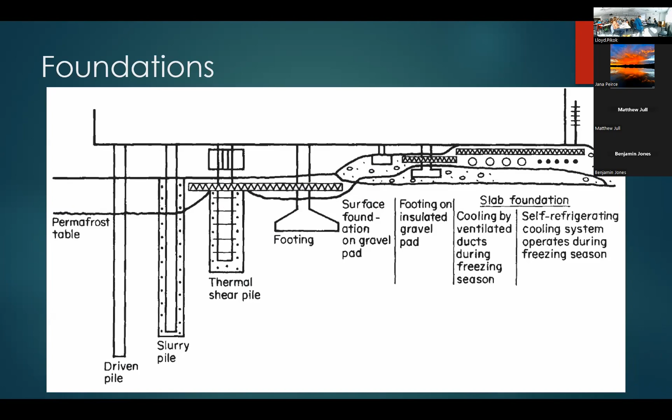But first, before we get into the piles, I want to talk a little bit about something that you're a little more familiar with, shallow foundations in permafrost, or shallow foundations just in thawed ground. Many of us live in thawed ground communities, and the way that we use our foundations is we let heat loss come out of the house, and it keeps the ground thawed, and it keeps it so that our house doesn't jack around or move, and we balance the energy from the heat inside the house and the cold outside the house to keep us in thawed ground, right?

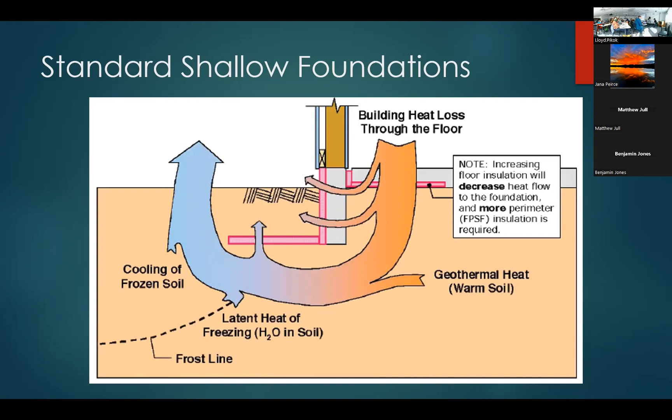And while we have a lot of people from communities in permafrost here today, this is kind of a more traditional, if you will, outside of the permafrost realm, what we do. And so the problem is in permafrost regions, we have this permafrost, and when you heat it up, it turns into soup. It turns into goo.

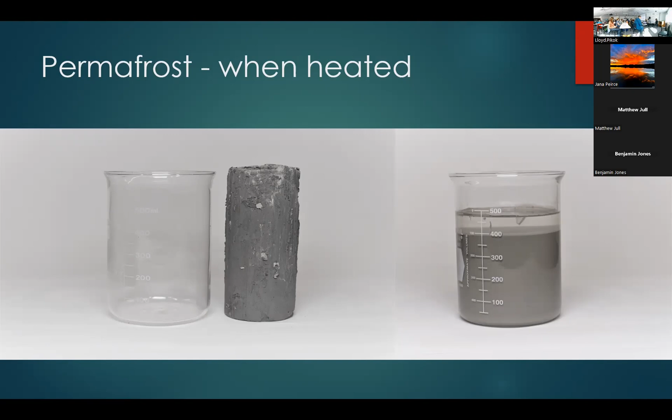I was in the bus with a few people looking at the foundations as we were driving into town, and people are observing. We've got these square piles, we got these round piles, we got a few different flavors, but what you see primarily is these houses that are off of the ground, right? And that's to decouple the structure from the ground below it, and keep the heat from going into the ground and thawing the permafrost.

Another thing that you don't see a lot of is concrete around here. How many concrete foundations have you seen in Utqiagvik? Not too many, right? There are some there, but cost of concrete, say in Anchorage, where I'm from, is about $150 a cubic yard. And then if you were to do it in rural Alaska, it's about $1,500 a cubic yard. So tenfold increase in cost. It's pretty inefficient to do that.

There's a lot of reasons why. Shipping batch plants and all the materials that you have to bring into rural communities is just not that efficient. And so as with the thermal protection and then the cost of other materials, we see a lot of pile foundations. So they're wooden piles, steel piles, you name it. Yeah, we don't see a lot of concrete around rural Alaska, and that's primarily a cost factor and efficiency of getting materials here.

So a lot of you that have worked in the permafrost regions, we kind of understand this, but I think it's worth taking a step back and making sure we're all on the same page with respect to what you're seeing out there.

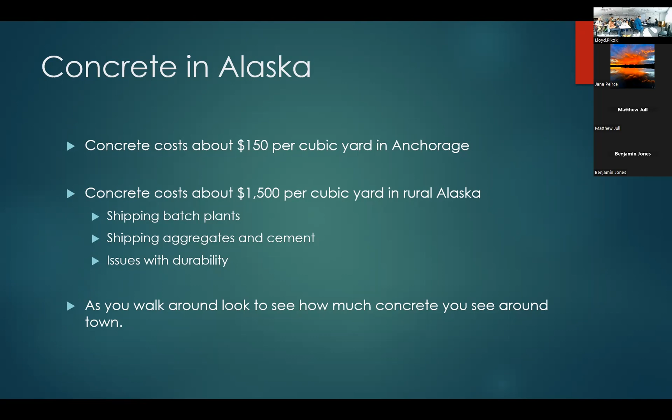So piles in permafrost foundations, we have a number of different pile types. Driven piles, so a lot of people are familiar with the driven piles. You use a pile hammer and you beat that pile down into the ground. The slurry piles are drilled holes that you'll set the pile in and then slurry back and let it freeze back. And then we also have a number of other sub pile types, helical piles that can be screwed into the ground, and a number of others.

There's a great UAF... what is it? The pile that crumpled up like an accordion is sitting there in the engineering department. If you're ever at the UAF facilities, take a look at that pile. Great example of crumpled piles. So this is a personal example of something that I've had to deal with driving piles in permafrost.

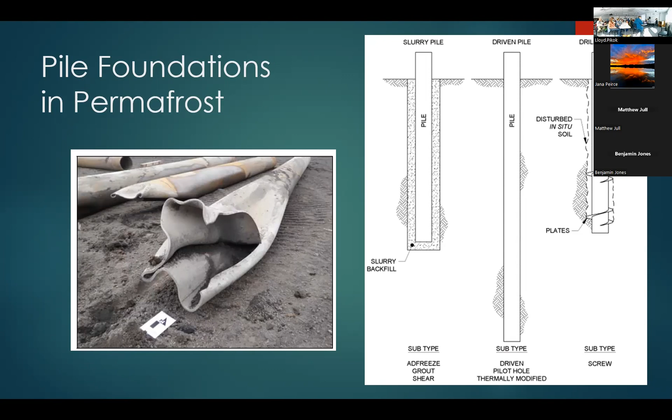So anyway, you got several different types of piles. And so I want to talk a little bit about how piles work, just so we're all kind of on the same page here. They essentially have what's called an ad-freeze strength. And that's the bond between the pile and the soil. I don't know if any of you have licked a flagpole in the winter. Right, that's ad-freeze strength between your tongue and the flagpole. That's the same thing that's going on within the soil as you let it freeze back and grab onto that pile.

You also have a creep movement. So there's that ad-freeze strength, that bond between the pile and the soil. But then there's also what's actually probably more important in ice-rich permafrost, like Point Lay and other communities, where you have this more viscoelastic response or behavior, where you have creep movement over time. You have this load that's applied over a period of time, and things just kind of sink into the ground. And so that's that creep movement. That's oftentimes, especially with heavy loaded structures, what really drives the design for how much movement you can allow.

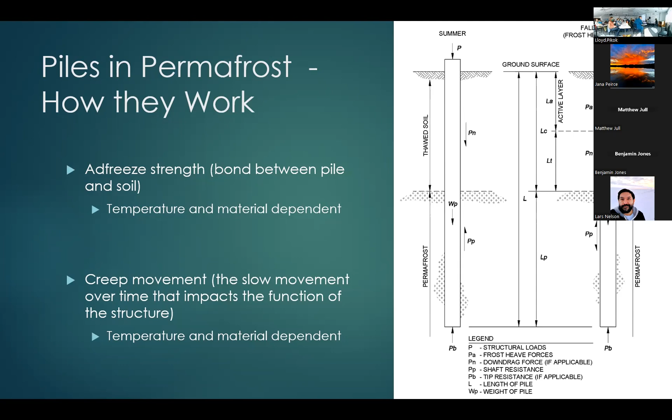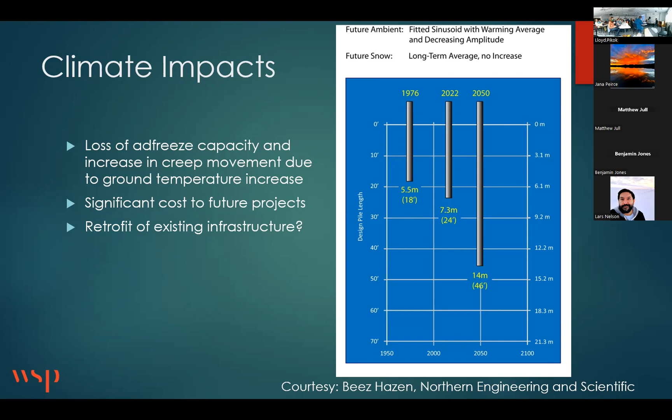But in 2050, we're up to 46 feet. Now, how many pile foundations have you seen up on the North Slope here that have piles down to 40, 50 feet? One. All right, we got one. And so right there, it's somewhat eyebrow raising because we can see that we have potentially some future issues that we may have to deal with.

I'm just going to touch quickly on thermal siphons. Thermal siphons are in this case a passive system that cools the ground by drawing the heat out of the ground. And it's used to drop the temperature of that pile and the area around it to get you some extra capacity so that you don't have to have as deep a pile. They call them heat pipes in the Alyeska pipeline. We're going to be riding down the haul road, and so you're going to see a lot of these sticking up out of the ground.

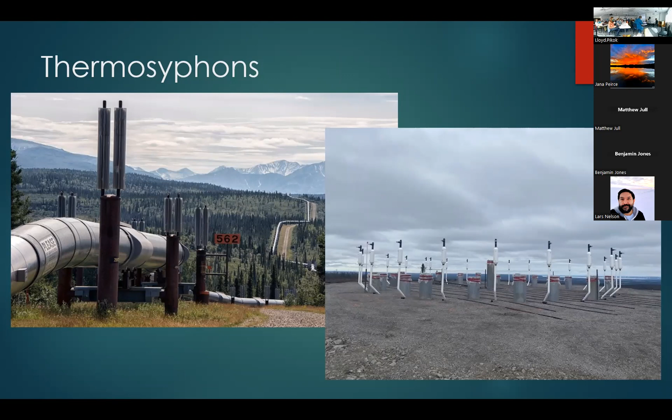In this other one, the fins haven't been put on the top for this wind tower foundation, but that's kind of what they look like. They put a thermosyphon on each pile to try to cool those things down. There's a whole bunch of applications of thermosyphons as well, so this doesn't do that justice. But that's about it with respect to piles and permafrost.

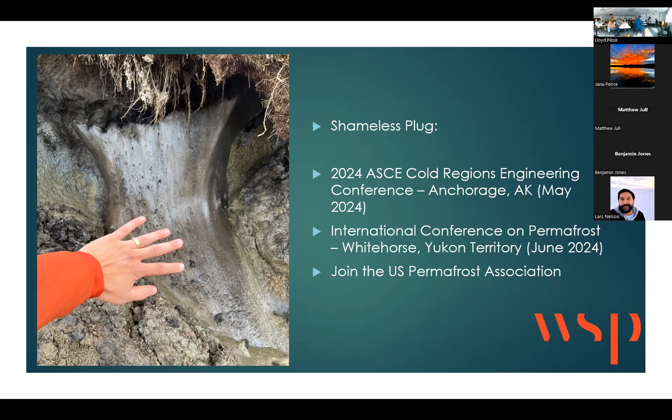It's a pretty complex topic, but I wanted to keep it somewhat simple and just highlight that temperature dependence and the things that we're starting to stay up at night worrying about as we see Vladimir plotting these temperatures over time and how those are changing. So anyway, there you go.